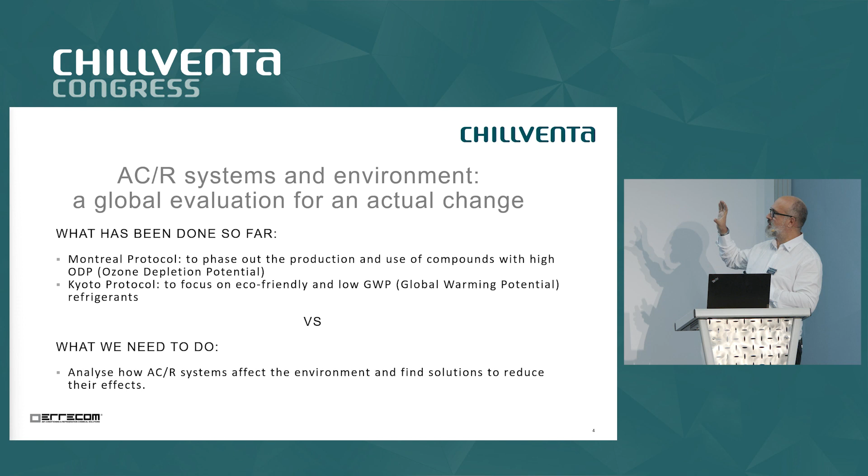Refrigerant lubricants can be the key for this kind of change, because the lubricant can change the efficiency and the stability of your system, to have a long life inside your refrigerant system. Every system has two important targets to respect, and we speak a lot about what we have to do about the refrigerant gas. But we have to think something about the global environment, about the system too.

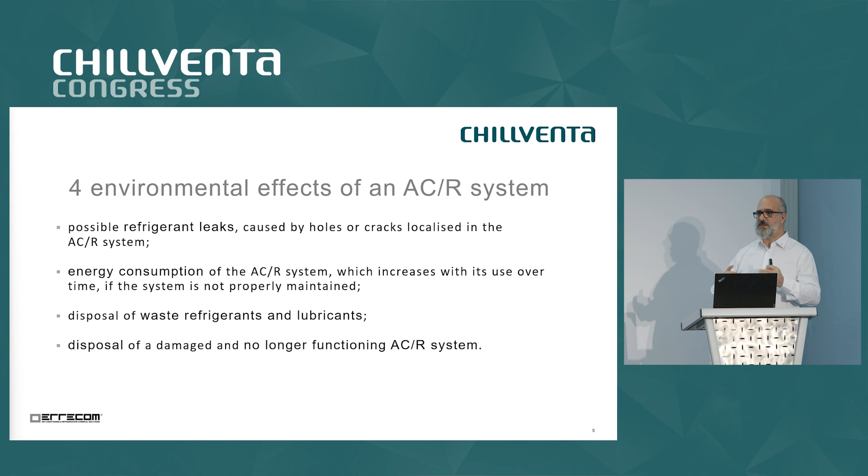The four environmental effects: most important is energy consumption, disposal, waste refrigerant, and lubricant, because the lubricant, when we cut it from the system, has to find a new life, and disposal for the system too, because if the new kind of system has a shorter life, this kind of system is reworked and recycled.

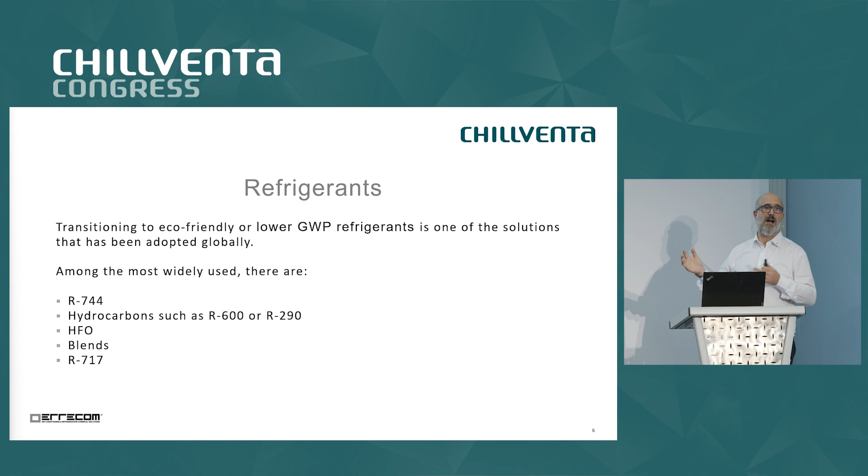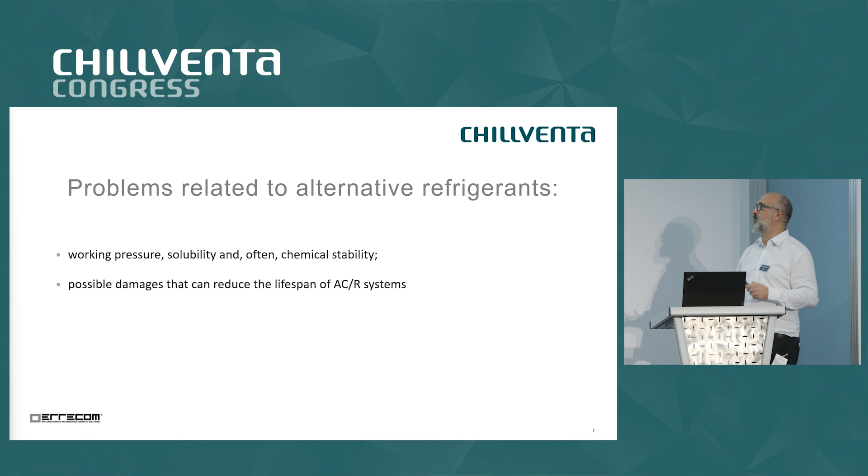The refrigerants most spoken about this year are CO2, hydrocarbons like R600 and R290, the HFOs and blends, and ammonia. This kind of refrigerant has some problems inside the system, problems of pressure, problems of chemical stability, and this kind of problem can damage and change the correct working of your system and the life of your system. For maintaining the correct efficiency, we need some additives, but the additives can't be put inside the refrigerant, so all you need inside your system arrives inside the lubricant.

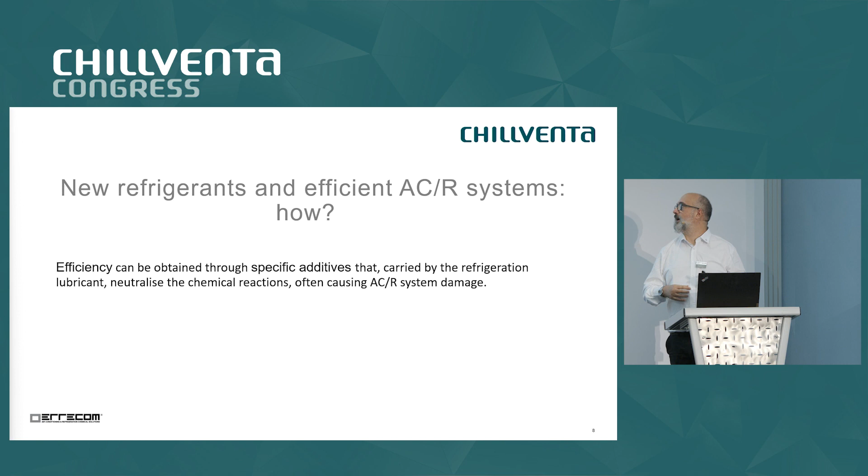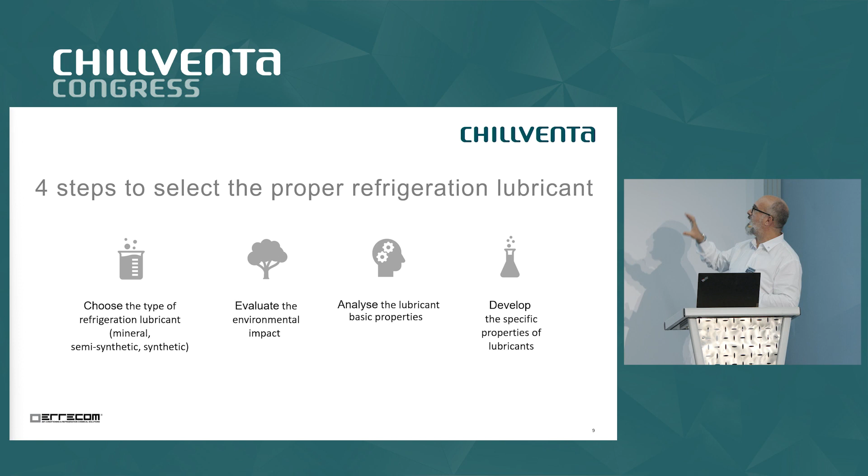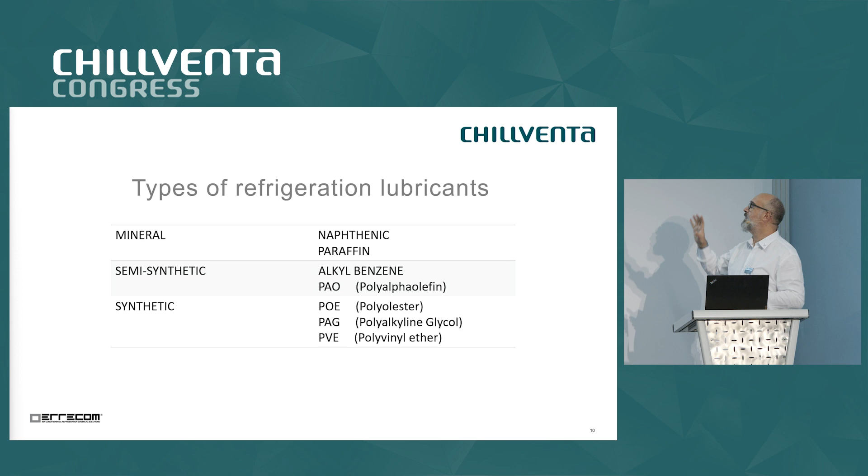How we select and produce a new lubricant: we choose the correct lubricant from the family, mineral, semi-synthetic or synthetic, evaluate the environmental impact, analyze the base of the lubricant, and develop the specific lubricant with the correct additive package. The most common families are mineral, semi-synthetic, and synthetic lubricants. In mineral, most common is naphthenic and paraffinic chemistry. In semi-synthetic, alkyl benzene and PAO. And synthetic, in this moment the most important, POE, PAG, and PVE.

Synthetic lubricants have an important plus compared to the mineral ones. They can be produced from natural material, and they are biodegradable. This is an important aspect for the environment.

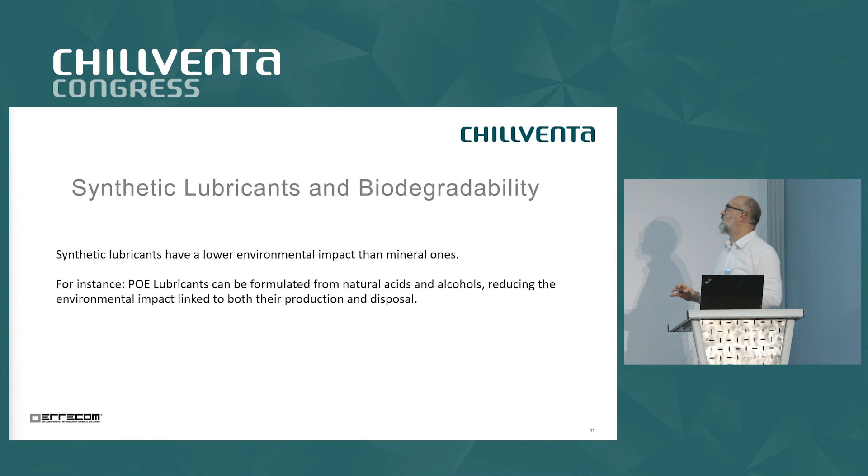The basic properties you check when you have to select a lubricant are miscibility and solubility of the refrigerant in the lubricant. The viscosity is the most important to select which kind of lubricant inside this family you have to use, the most famous being 32 or 100, or 220 when we have a very big system to lubricate. Viscosity index is very important because it's the capacity of the lubricant, when the temperature is higher, to maintain the capacity to lubricate the system.

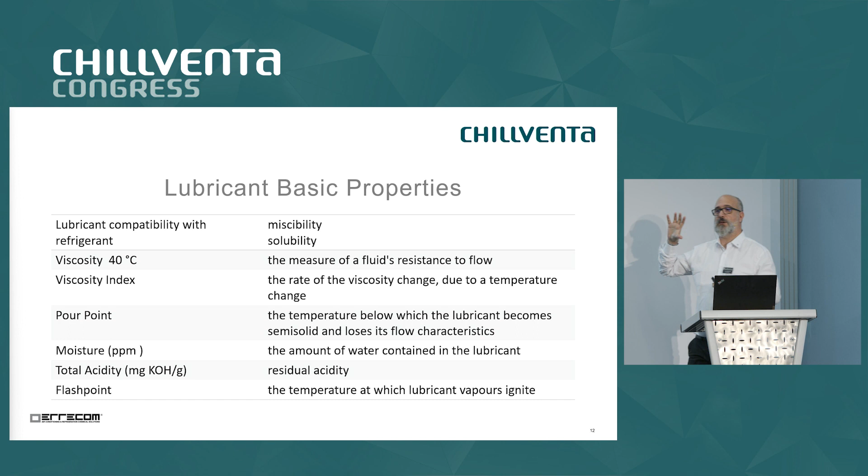Pour point is the point where the lubricant stops working and becomes solid in the system. Moisture is the presence of water inside the system, because we know water is a very big problem inside our system. Total acidity is the presence of acidity, carbon acidity or chlorine or fluorine acidity, children of the refrigerant gas, which is very dangerous for the system. And the flash point is the temperature at which the lubricant can take fire.

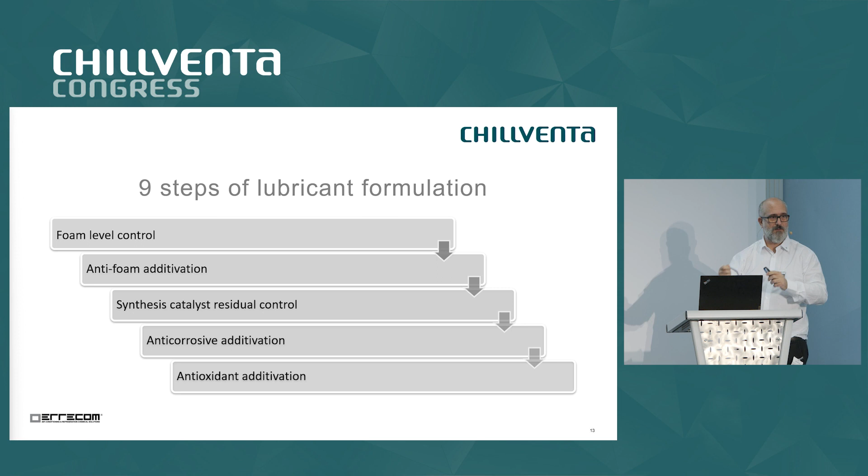When we design a new lubricant, we have steps to control and correctly additivate the lubricant. Foam level control, so anti-foam additivation; synthesis catalyst residuals inside the lubricant, because if something we need to produce the lubricant stays inside the lubricant, this product can break the lubricant back down to the raw material, so we have to control and eliminate all the catalysts inside the lubricant; anti-corrosive additivation, antioxidant additivation, and this works for the system, for the lubricant, and for the refrigerant gas. These two kinds of additivation are very important and are the key for the future of the lubricant.

Anti-moisture additivation, and for Errecom, anti-moisture was a very big, important work, because we are able to remove moisture inside the system, and I don't speak only about the filter. The filter is fundamental in the system, but it is static, it is in one position of the system. If you have anti-moisture inside the lubricant, you have something that travels in the system, and it's very crucial, very important.

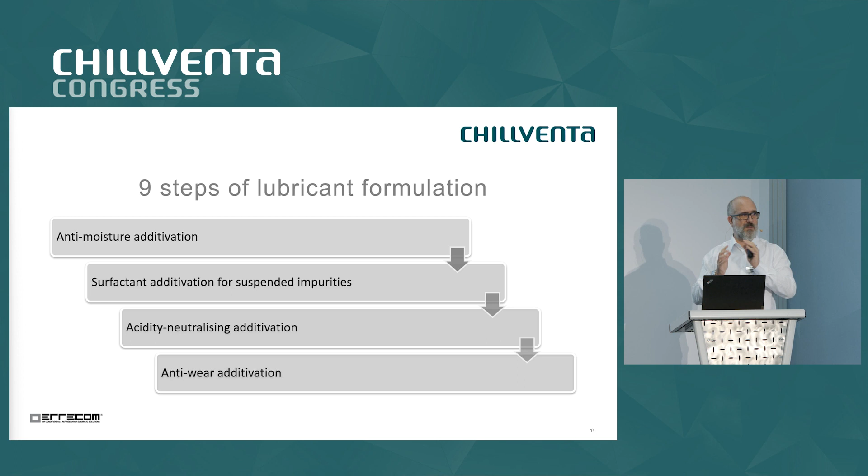Neutralizing acidity, because acidity is a dangerous enemy of your system, and anti-wear. Of course, when we put lubricant, we put it to have a correct lubrication of your system.

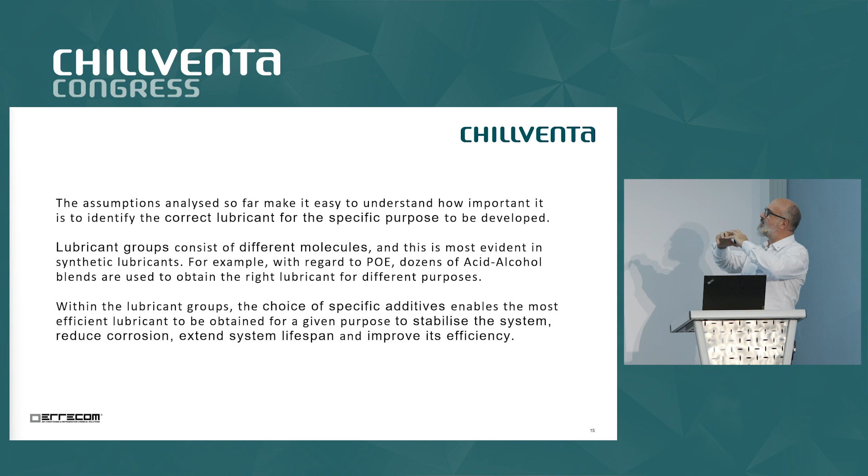Every lubricant is a mixture, and in particular, POE is a blend. When you think of a lubricant, you don't have to think of only one molecule. It is not only one specific species, but everywhere it is a blend of different materials and molecules to arrive at a correct result inside the system, for correct stabilization, correct corrosion control, and to extend the life of the whole system.

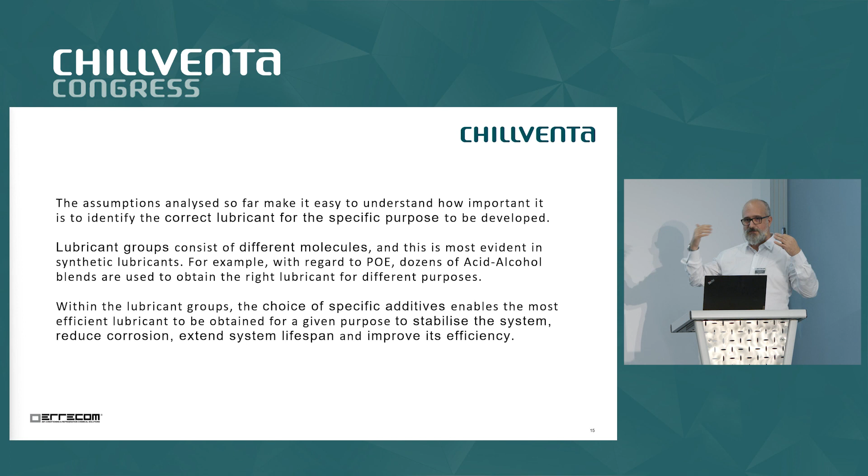Now we go to see the most important in this moment: our study is for hydrocarbons. Hydrocarbons came back as very important in the last years, and we started to study a new type of PAG with a new series of additivation. In this case, we study which kind of capping, because PAG has one or two caps at the end of the molecule, and we can select the type of cap most efficient for use in our system with this kind of refrigerant, and we can find the best to reduce the energy consumption for the life of the system.

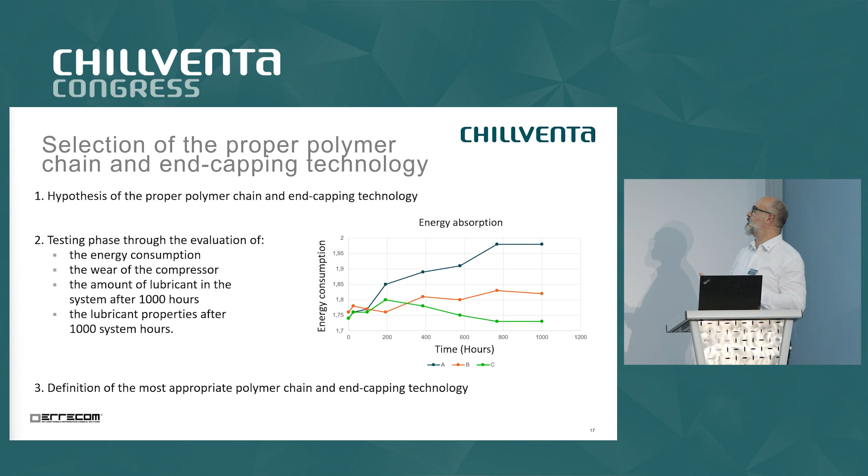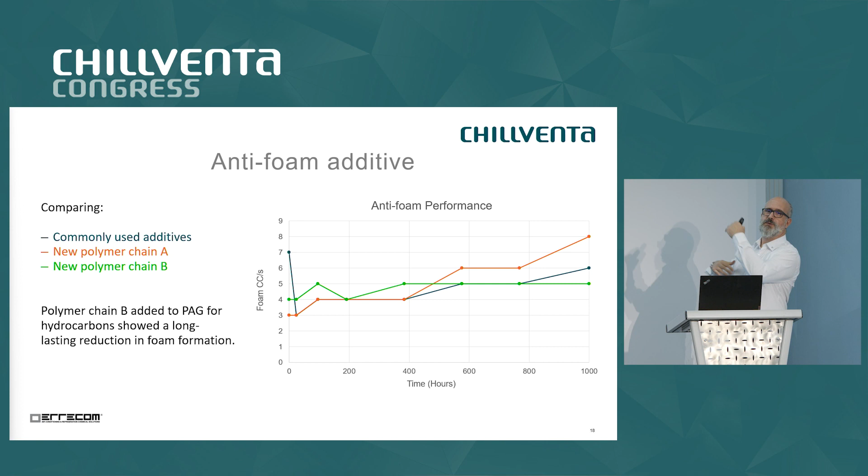The type we call C was, in our tests, the best solution we could find. And we put in an anti-foam additive, and we selected a new type of anti-foam to put inside our lubricant. And anti-corrosive was very important.

Anti-moisture: we capture the moisture inside the system and protect from chemical reaction between the water and the metal of the system, and the acidity present in the system, because moisture can produce acidity by reacting with some material arriving from the refrigerant, from the lubricant, and from the system too. This aspect is very important. A lot of molecules can stop the water, but they produce solid material. And we have found a molecule that reacts with the moisture to produce a molecule more like a lubricant, that does not become solid.

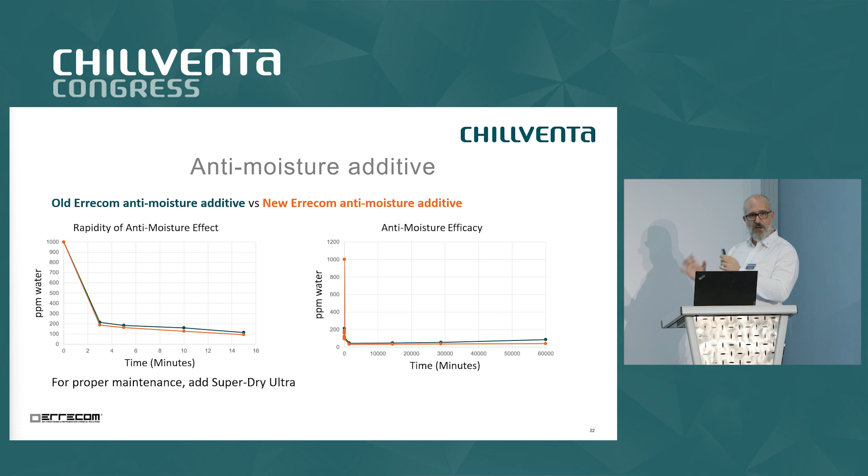HFO and HFO blends are very important. We speak about low GWP refrigerants, but if the refrigerant is able to destroy itself outside the system, sometimes it destroys itself inside the system. For the long life of the refrigerant we need something to reduce the chemical reactions the refrigerant can have. And it's most important, when we study a lubricant for HFO, to have a lot of stability, a lot of antioxidant and anti-moisture inside to protect the refrigerant too.

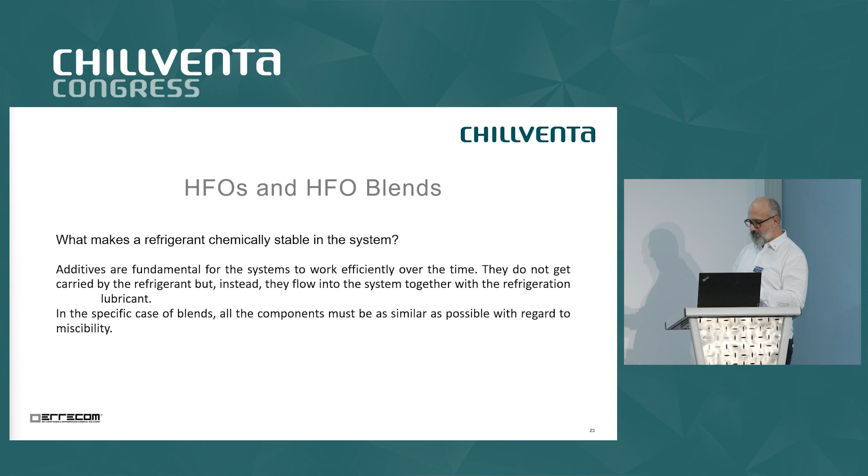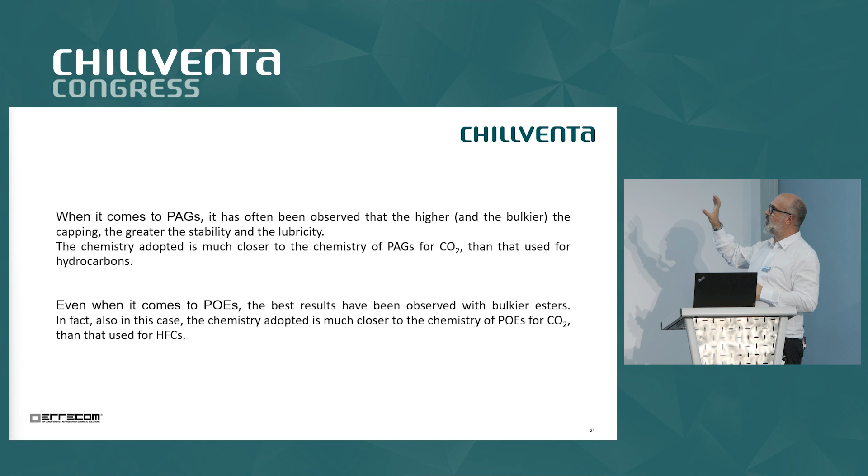The same, the base molecule for this kind of application is different from the other molecules we use normally; it is a chemistry more similar to the chemistry we use for CO2. Because the chemistry for CO2 is more stable and stronger. I don't know if it's simple to understand, but it is more resistant to the action of the refrigerant, and we study if it's best to apply something more similar to this kind of chemistry to the base. We produce PAG for CO2 and POE for CO2. CO2 is the most peaking in this moment.

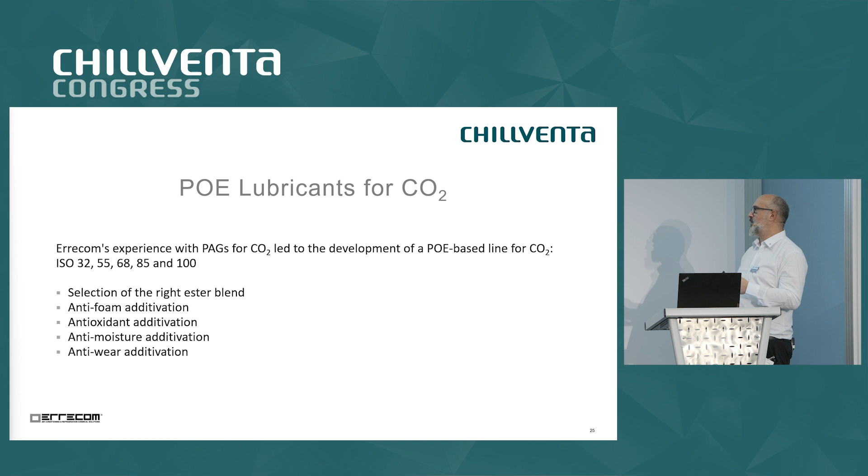Refrigerant gas is common, is present simply in the ambient, and for sure needs the most attention for us to produce a correct lubricant. It has the same history as the others. We need every kind of additive: anti-foam, antioxidant, anti-moisture, and anti-wear, of course. Start by selecting a correct ester, correct solubility for the CO2, correct additivation for the lubricant, and go to work

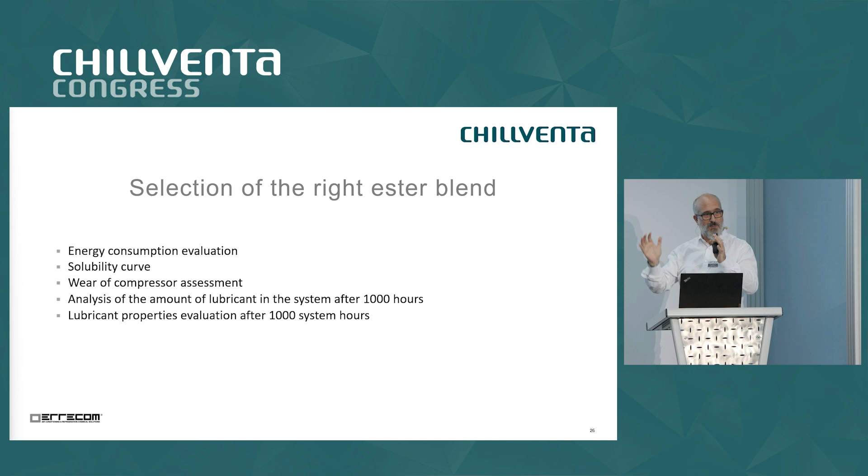the system for a very long time, to imagine what happens inside the system, to be sure to have found a correct application. We can make a study of miscibility of our oil and refrigerant. There is the area that is miscible and the area that is not miscible. And it's important to know, because it's important to have in some area miscibility for the refrigerant to have a correct transportation of the lubricant in the system, but not so much miscibility as to have too much lubricant inside of the system.

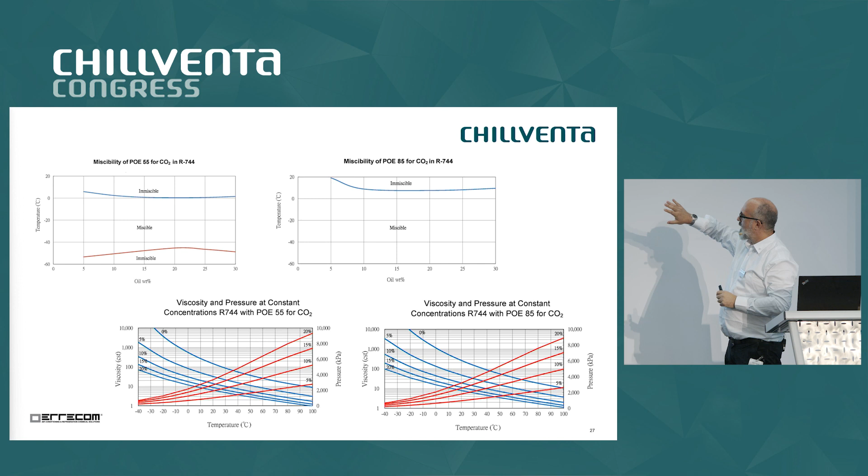And we can study it with the Daniel plot, study the correct activity of the lubricant at different temperatures and pressures of the system. And we can understand which kind of viscosity the lubricant maintains, if I have a working temperature of, I don't know, 70 degrees, and at which pressure the system can work. And this is very important to design a new system.

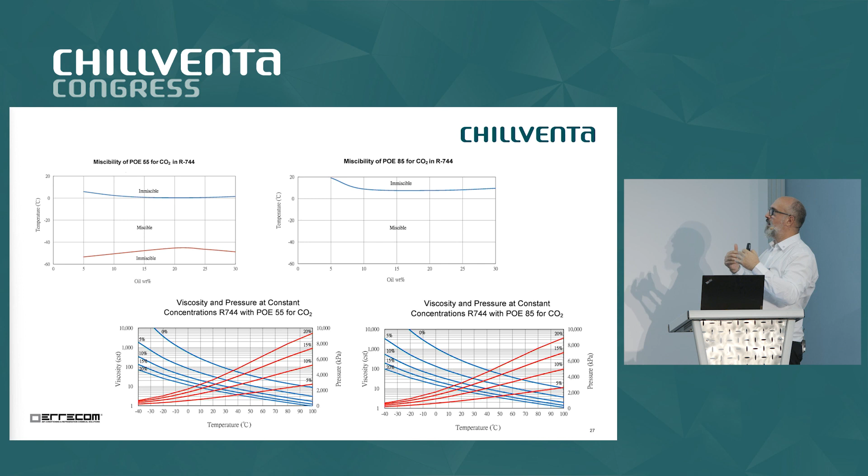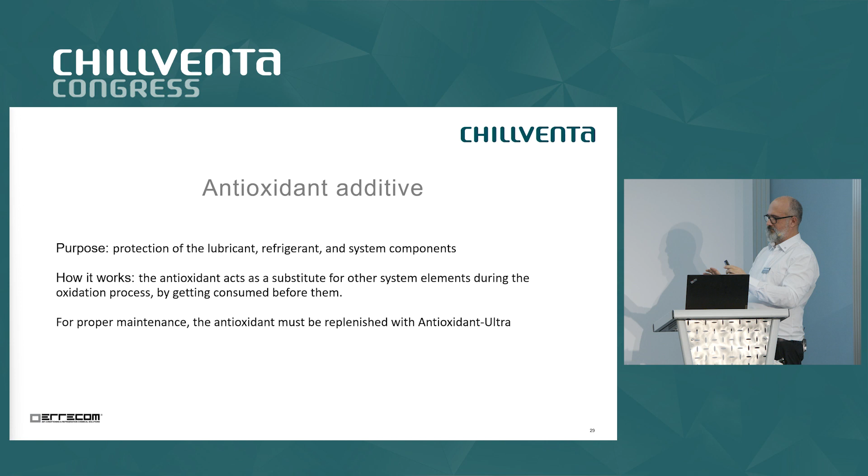The same for the CO2: it is important to have anti-foam additive, the same kind of study to prepare the oil, antioxidant additive to maintain stability of the system. And for us one of the big targets is anti-moisture, for sure. The same for the other lubricants. In every kind of lubricant, for every kind of application in refrigeration, there is not only the lubricant. There is a big part of additive.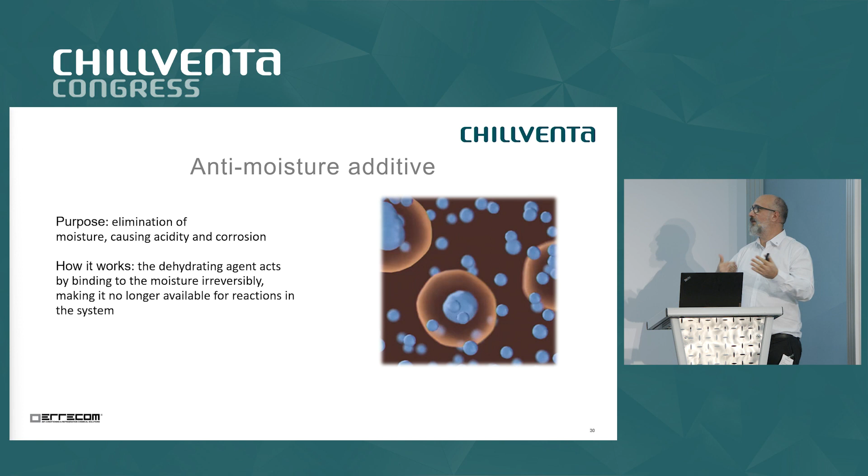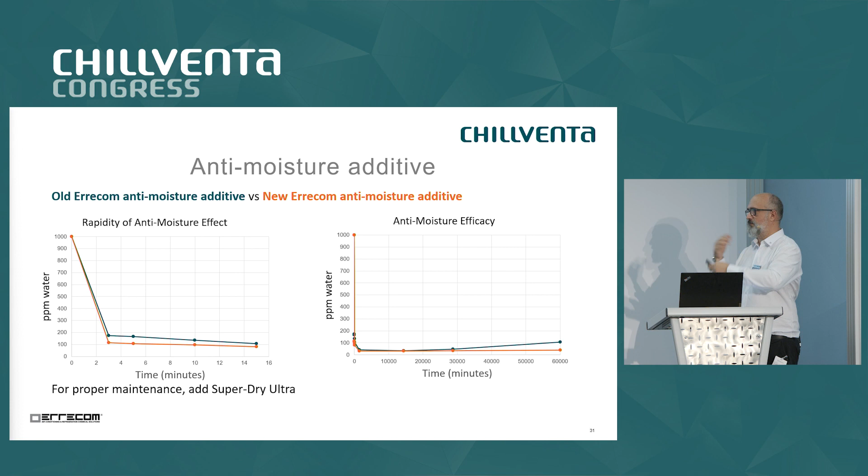When some technicians tell me, no, I don't put additive in my system, I put only lubricant, it's not true. The lubricant is full of additive, and must be full, because if you don't have additive inside the system it cannot work, or it can work, but the life of your system is very, very, very short, and you must put this kind of product inside your lubricant. The study for the anti-moisture was similar to the other studies of the lubricant, and anti-wear too.

We have to have the maximum activity of lubrication and the minimum request of energy from the system to have correct work of the system. We have to control the viscosity correctly and have correct maintenance of the system over time. What we have observed in our study: if you find a correct lubricant for your system, for the new refrigerant, we observe an important reduction in energy absorption. From a system that consumes 100 kilowatts of energy, we save 3 to 5 kilowatts for every step of 100 kilowatts.

In the year, we reduce a lot of consumption of the system and reduce a lot of consumption of the metal and material of the compressor. We have 22% better reduction of this kind of problem. What can we do? And I close my presentation.

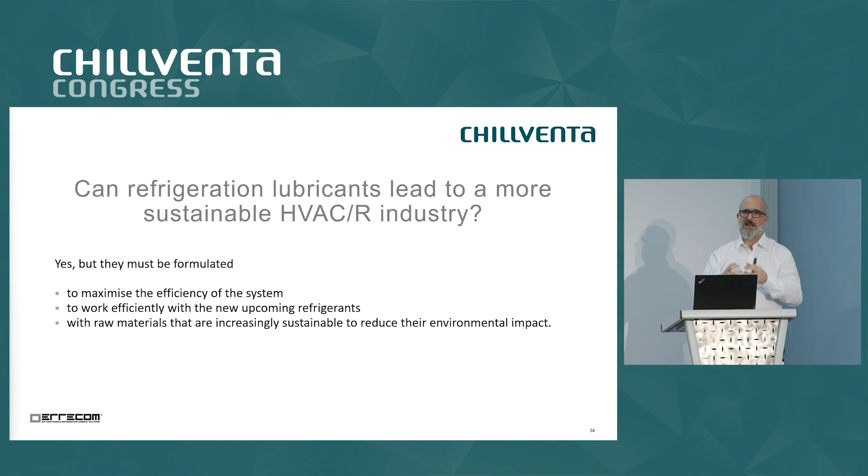We have to work to maintain the best efficiency and have the objective to have the best system ever, not only in refrigerant and mechanical steps, but with all attention to the lubricant. It is the center, the core of the compressor.